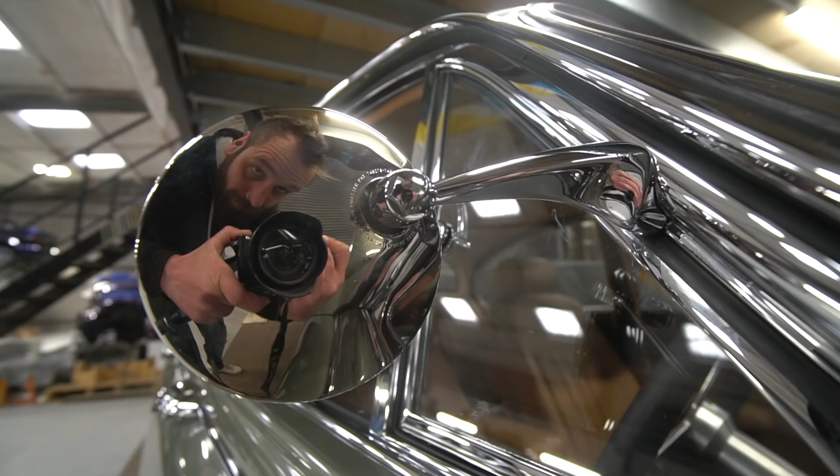So for me, you can see a bit of this latch in the passenger one, but I know Ian, who we're doing the car for, is a bit smaller than me, so he's going to be sitting further forward, so I suspect it'll be fine. So yeah, really happy with those.

They're on. And the other thing was the start switch, which we went a bit around the houses on the design of that as well. We've got the main switch panel has got these things called chicken head switches on there, and we did like a big version of that for the start switch, and we 3D printed it, and I was happy with it.

And then I just happened to be working. I was taking the clutch master cylinder out when that had a problem the other week. And I looked over while I was in the footwell, and we had the prototype one on there, and I thought, actually, it's blocking the text that says engine crank underneath, which was a nice detail on there.

So we went back to the drawing board, and we looked at some 1950s Rolls-Royce dashes, and there was this really cool - I mean, it was chrome in the Rolls-Royce - but this cool sort of crank handle design that was like a little round dome with a flat blade that sort of curved out slightly. So we drew up a version of that.

And then 3D printed a trial, really happy with that. Customer said okay, so Andy at Concept 303 machined that from acetal, and that looks great in there now. So I think that's just the finishing touch on there, brought everything together there.

The mirror's on. I've finished all my spanner checking work on this now, just got to put the rear spats back on. And I'm essentially now waiting for good weather.

We were just saying before we put the camera on that outside at the moment it sounds like all hell's breaking loose. There's rain lashing down, wind rattling the shutters. So I'm definitely not going out in it today, that's for sure. But yeah, next week, fingers crossed for the weather. I'm just going to get some miles on this, and then we're very close to handover.

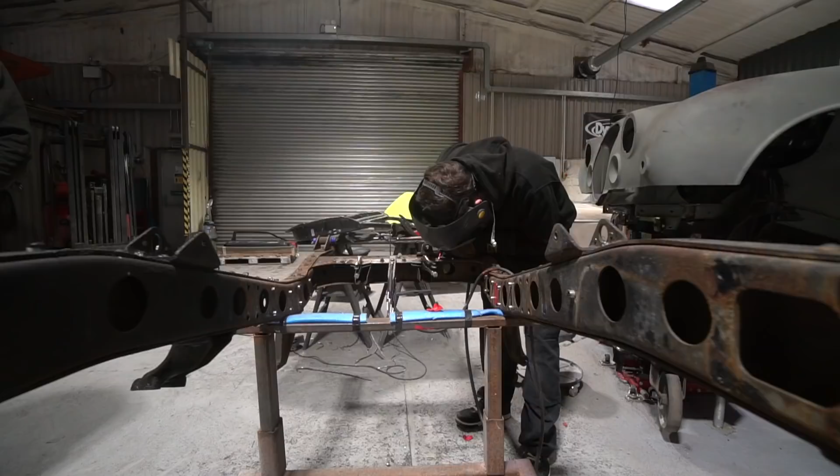Land Cruiser, I'm going to mention mechanically, it's not here at the moment. In fact, most of the components aren't here because we've been going through the various processes of getting everything ready. So I think last time we mentioned that we were getting the chassis ready to be blasted and powder coated. There are a few little things to do still on that.

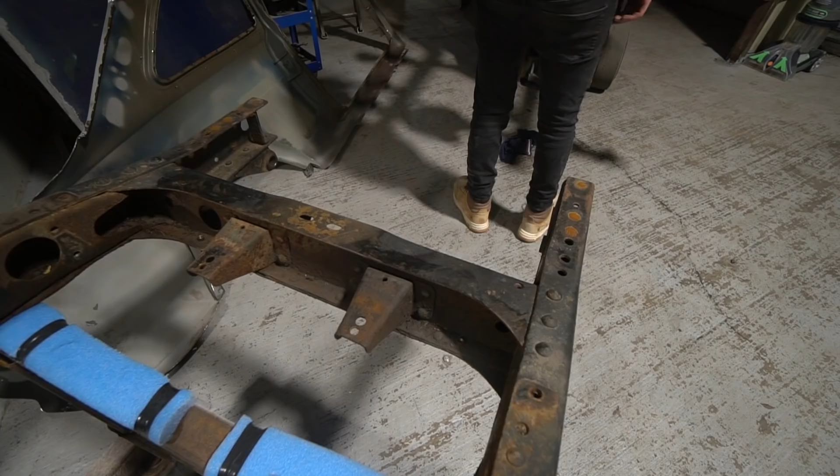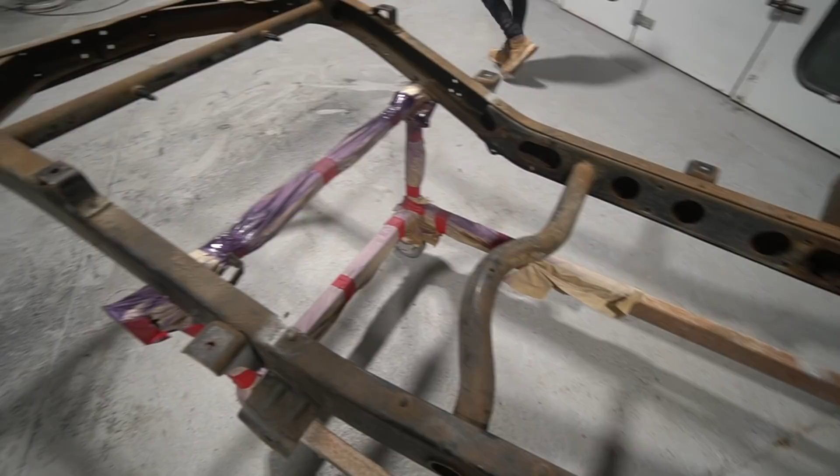So Tom was going to do a modification on where the rear cross member is and the rear lights mount. There's like a little tab on the end with a threaded insert in it as standard, and we were getting rid of that and putting a little smooth end on which matched the profile of the machined lamp protectors we'd made. So he was doing that change, and there was another change as well, and I can't think what it was.

There was a small hole we had to put in the front for where the spotlight bracket we'd made - it's like a tubular mount for the spotlights. We've drilled holes in there to run the wiring to the spotlight through the mount, and then we wanted to join that with a hole on the chassis so that the wiring is completely hidden.

And then we were also masking all of the threaded holes on the chassis so they don't get powder coat build-up in them. There's different ways you can do that. On a lot of the stuff, we've been prepping loads of components for it this week as well. We've got these little silicone conical bungs that you can put in to stop powder coat getting in.

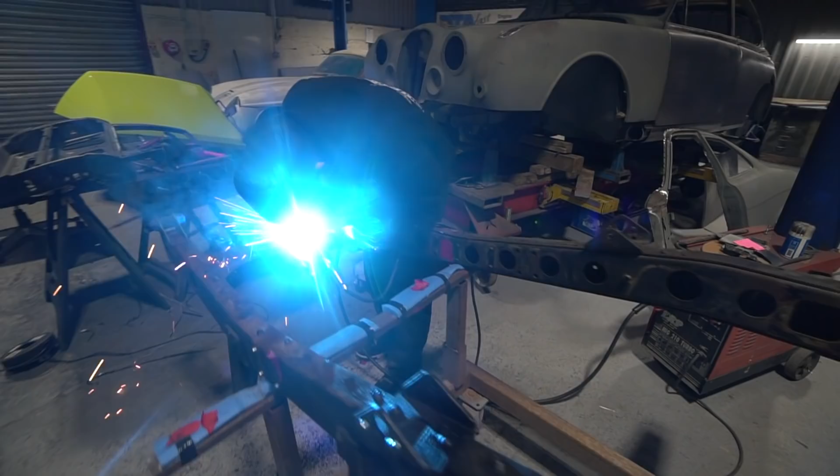On the chassis, we've actually done bolts in all holes, just sacrificial bolts essentially. They're cap heads, and we just fill the Allen key socket with silicone, so you can ping that out afterwards, get an Allen key in there, and undo them.

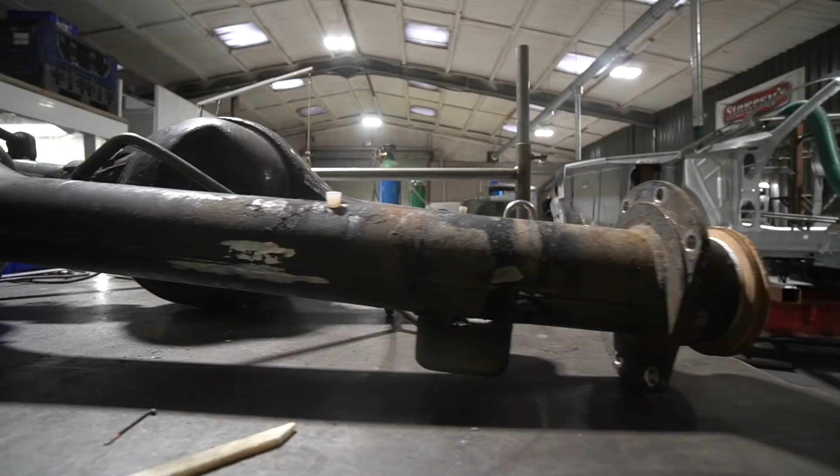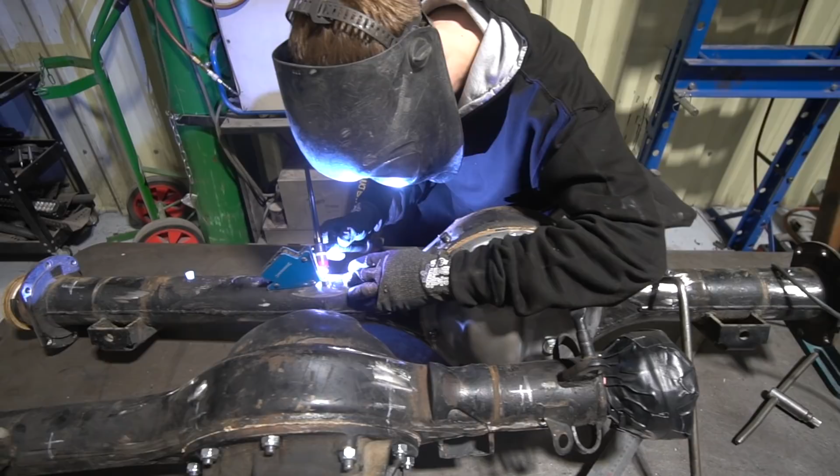It's just a nice way of keeping the threads really clean without it falling out during blasting. So the chassis is ready, the axle casings are ready - we probably showed them being prepped last week, but with those we strip everything out the axle, get the empty casing, bolt it back together, and then anywhere there's an opening, so the pinion hole and the axle shaft holes, we get wood cappings that we make, sealant them on, attach them with a threaded bar right through the axle and on the pinion as well. So everything's completely sealed up, and any machined faces, the mating faces, are masked by virtue of the casing being reassembled together. And things like the flange where the pinion goes and the axle half shaft flanges are masked by these wooden caps. So any machined surfaces are kept free of powder coat.

So that's ready to go. And then there's been various other bits we've been prepping for powder coat, masking up holes, etc. So a massive batch of parts has just gone for powder coat - I'm not actually sure how many, but I'd say there was a good sort of 20 to 30 parts.

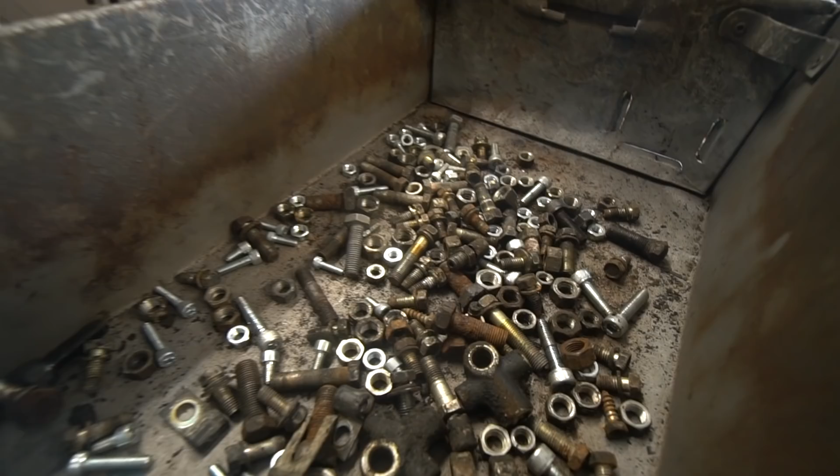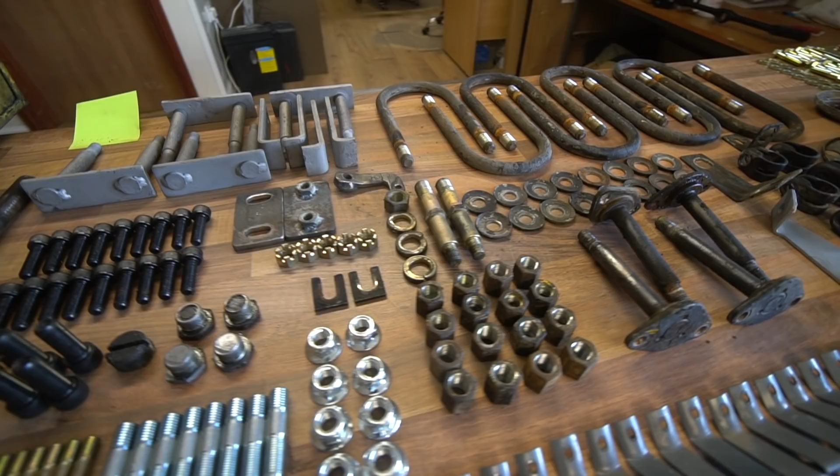And then the fasteners for the Land Cruiser - all the fasteners for the axles, anything attached to the chassis, body mounts, leaf spring shackles - they've all been prepared for Xylan coating, and also all the moving parts or components of the axle that have things bolted to them, like the knuckles that have the calipers bolted to them. They've all been prepared for Xylan coating.

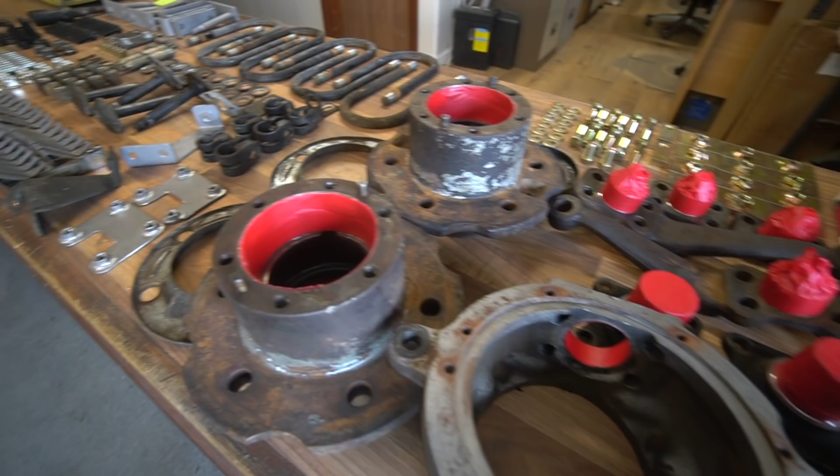And the leaf springs themselves, we wanted to use original leaf springs with a view to them being probably better quality than aftermarket ones, so we've actually stripped them apart to the individual leaves. They're going to be Xylan coated, which is quite good because it's a Teflon coating essentially, meaning there's a bit of slip between the leaves, and then they'll be re-riveted back together afterwards. So there's been a Xylan plating batch, which was I think 700 odd parts.

And that kind of brings me on to something the customer mentioned, because I showed him a photo of all the engine fasteners coming back from zinc plate, and they're all just in a big tub. And he said, how on earth do you know where they all go after you've had that done? Which is actually a really good question, and it's worth pointing out our process there.

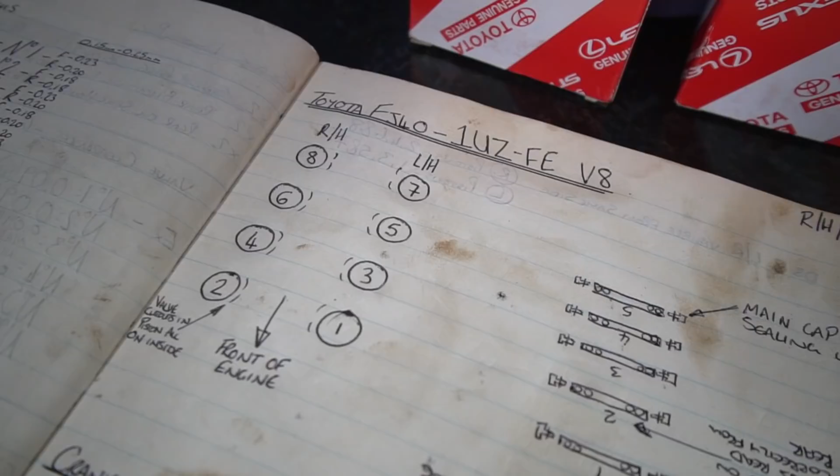So on the engine fasteners, for instance, when Adam stripped the engine down, he literally got a list in a notepad of every fastener, where it was, the size of the fastener - that's all in a massive list. And then what we do is we put those fasteners, as we take them off, next to a bag which we've labelled as what part of the engine it came from, let's say inlet manifold bolts, whatever. We photograph them next to that bag, so you've got a photo with the bolts and a label of what they did. Then the bolts all get put into one big tub which goes away for plating or coating. But we've given them then a stack of bags that are labelled, along with the photos.

So when they come back from plating, we take everything out of the big tub, and then we can use the photographs as reference to match them back up with their bags, put them in the bags, and then we've got a stack of labelled bags with all the components and where they went on the engine, plus as a fail-safe, a list as well in case the plating company lose everything. So that's how we do that.

Going to move over here. This will be a surprise - Vader is back here, and much to my frustration, and no doubt the owner's, we had a failure on it. So the clutch slave cylinder, which is a concentric slave inside the bell housing, failed very, very soon in him having the car back. He'd done a couple of journeys, but not many miles.

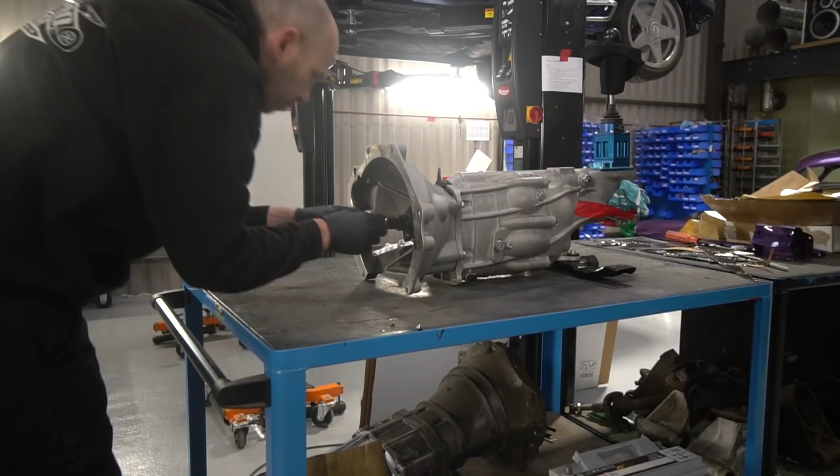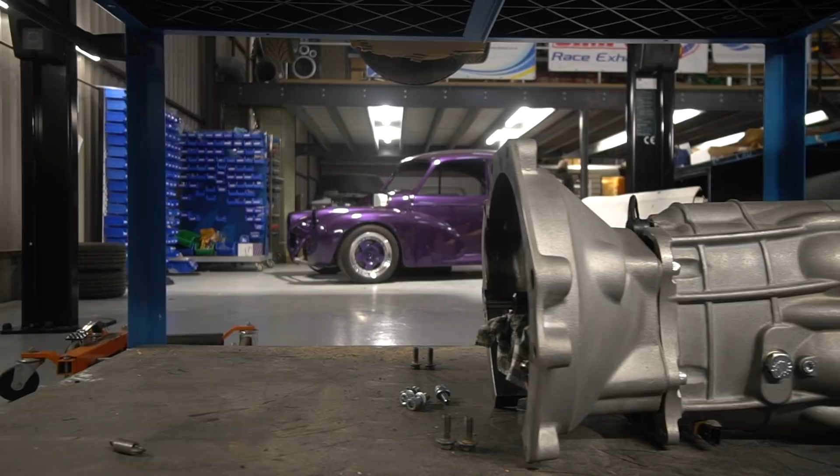Rather frustrating - the clutch pedal went to the floor, fluid out everywhere, and sure enough we took it apart, and the seals have failed in the clutch slave cylinder. So you probably watched previous episodes where I've been ranting on about poor quality aftermarket parts, and this just tallies up with that again. So we've got this out to replace the one that was in there with an AP one. I've got an AP clutch slave coming, and we're just machining up a different adapter because the bolt pattern's slightly different.

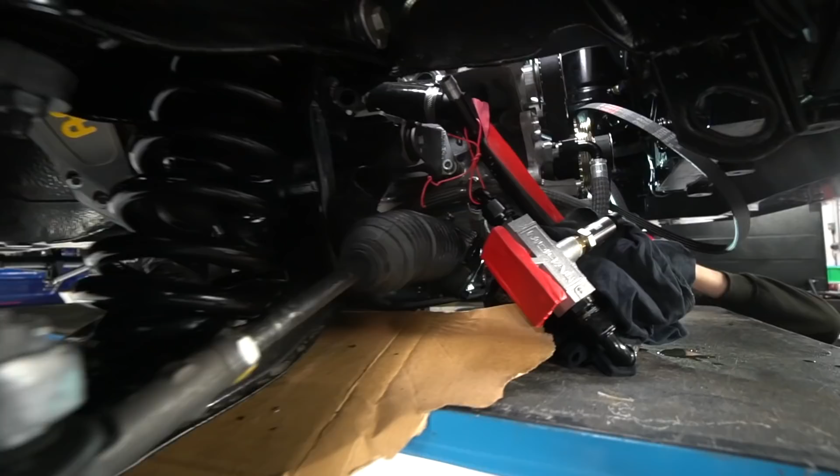I'm not totally surprised it happened, because the other Chevette we built had the same failure, but it lasted a lot longer before that failure occurred. Actually, we'd put this one together before the other one failed, and it had done a good few seasons of rallying. So I kind of put it down to the trauma of a few seasons rallying, but it's not.

It's evidently an issue with the seal inside the cylinder, so both cars will then be running AP cylinders once we've done the conversion on this.

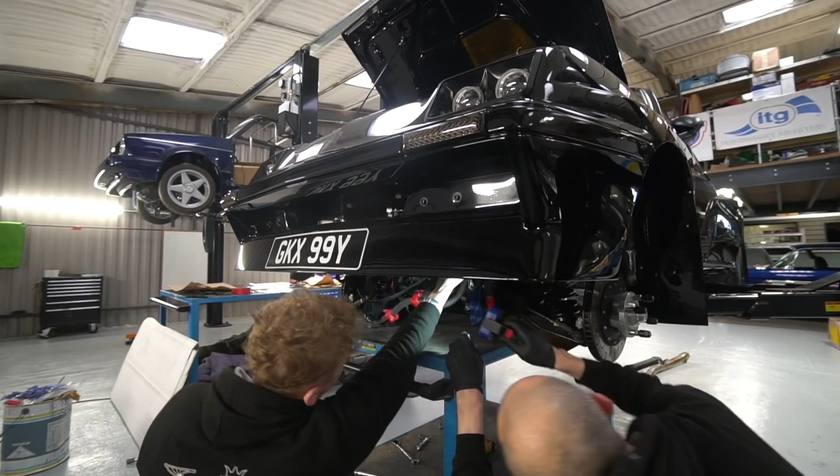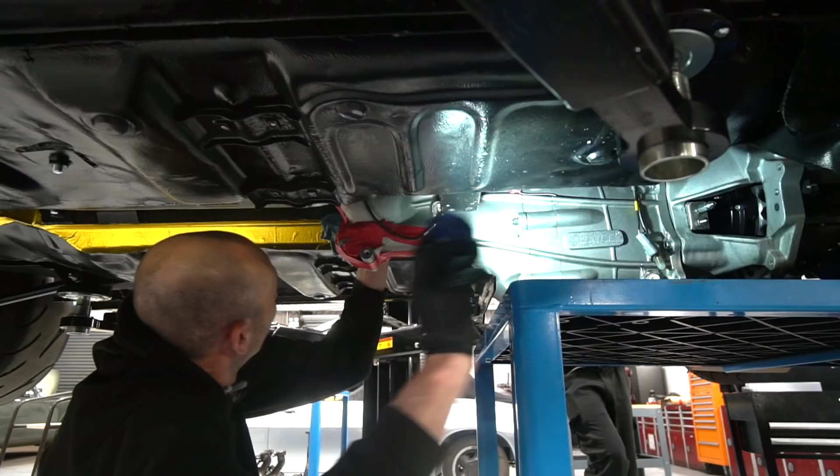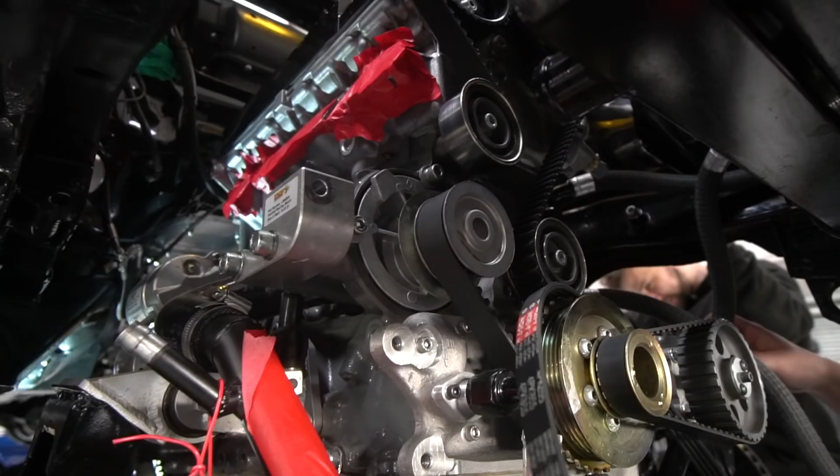So everything out - it's easiest on this to get the engine off, the gearbox off the engine. You can't just pull it back because of the way the shifter sits through the hole in the tunnel, so it's almost impossible to get the gearbox off the engine in situ. It's actually easier just to drop the entire front subframe down with the engine and box on it, then separate it all. It's actually given us the opportunity to tackle a couple of other little things as a result of snagging and shakedown.

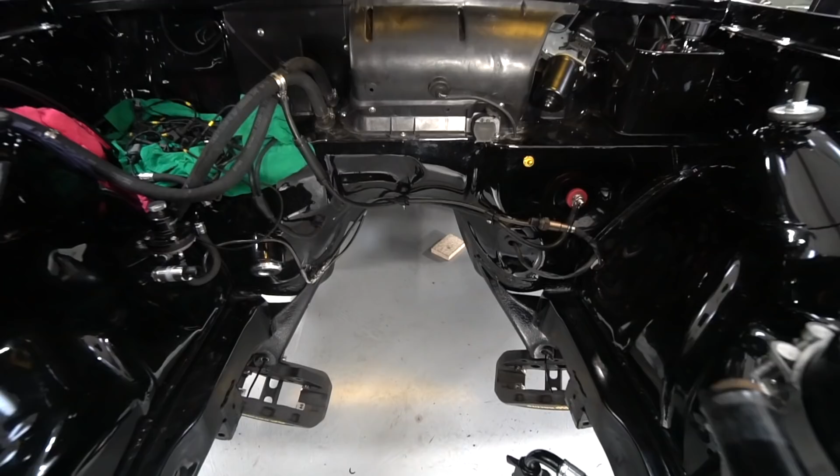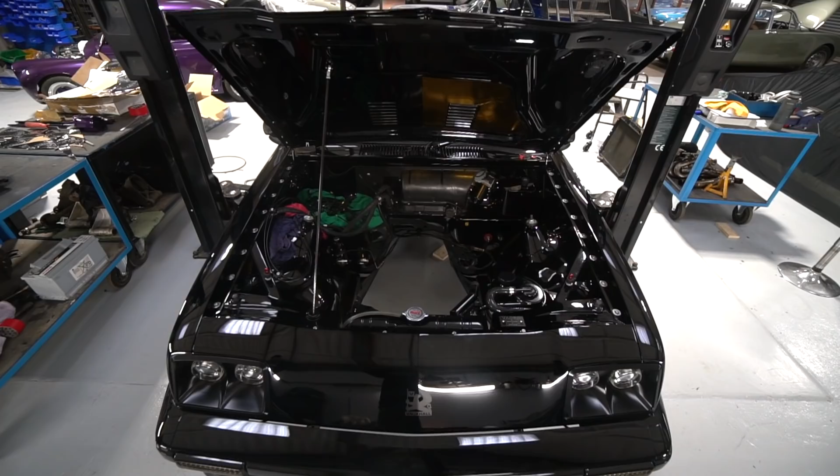There was a very small oil leak which only seemed to occur when the car was switched off, which is likely the dry sump tank draining back into the sump and basically filling the engine up to the point where there's oil sitting against the crank seal on the back, and I suspect that's what it would be. As it is, I've just sent the engine back to the engine builder so he can have a look and determine where the leak was and reseal it all. But it was convenient to get that done whilst we had it out.

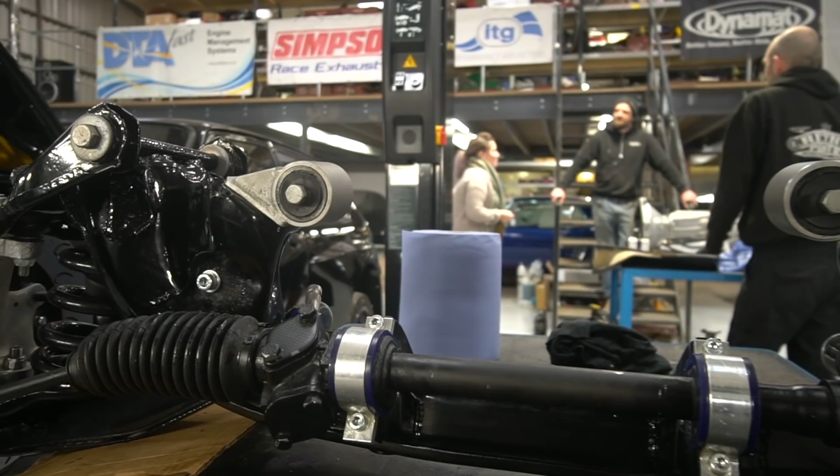We're also going to swap in some of our softer World Cup engine mounts. We did our own for Gordon Murray's car a while ago that are 40 Shore rubber rather than the 70 or 80 Shore that the usually available ones are. Although it wasn't really an issue with this one running the harder ones, because it's a fairly raw motorsporty car anyway, while we had the engine out and we now have a batch of those in stock again, we thought we'd swap them in just to get the engine vibration levels down slightly.

So yeah, basically clutch repairs, tackling a couple of other things while we're at it, and then that'll be going back to the owner again.

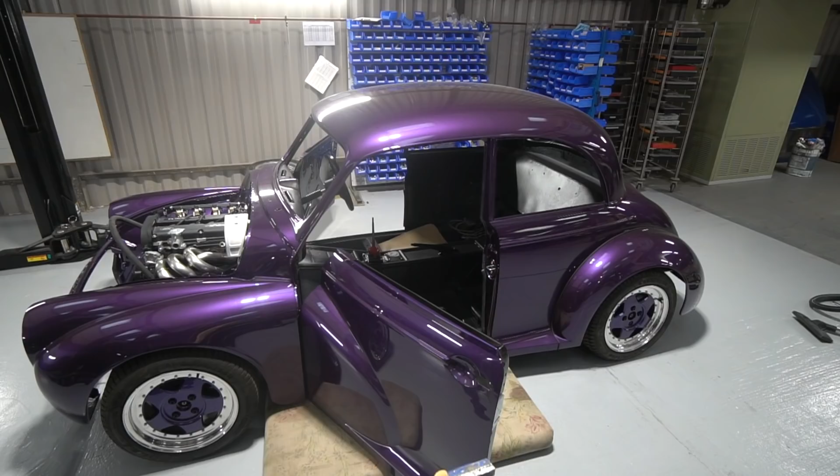John's been on with the Morris - in fact, he's on with it right now. So we're doing the Dynamat sound deadening on the inside of the Morris shell.

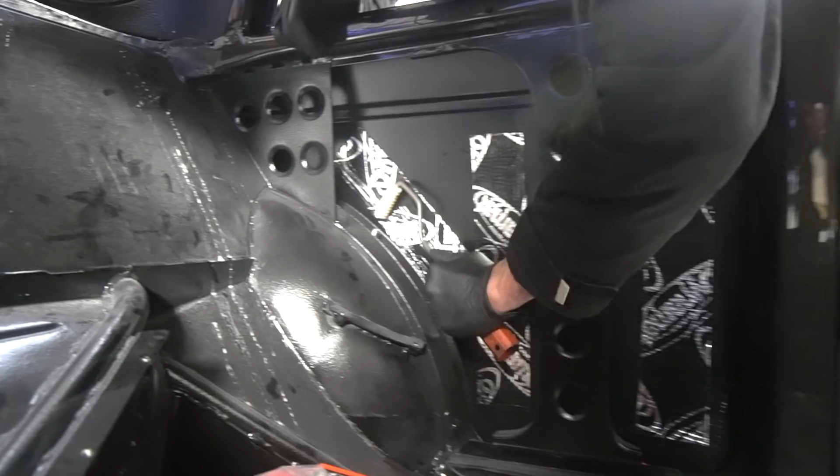Basically templating all the different areas where it's going to go, using paper, just cutting paper to the shape we want, transfer it onto the Dynamat, cut the piece out, stick it in, move on to the next piece. That's going really well, and it does really help keep that kind of drumming of the panels down, and on a car like this where we're trying to make it fairly refined, it's a really good step.

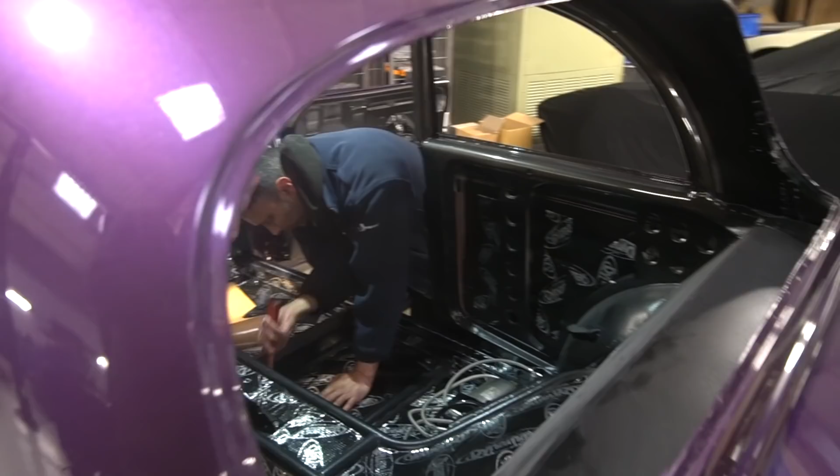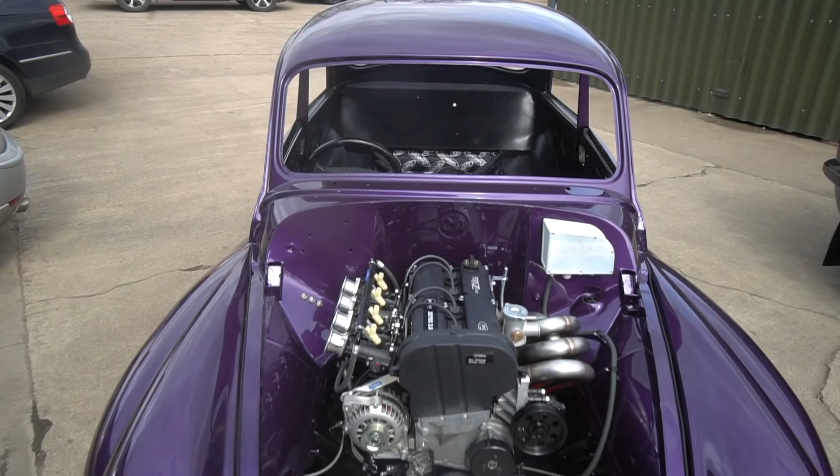On top of that Dynamat Extreme, we'll then have Dynaliner, this half-inch Dynaliner, which is more like a foamy material, which helps further deaden the sound, but it's also quite a good temperature barrier. So the car's going to have aircon, and it'll keep a lot of the exhaust heat out from the cabin and help keep it cool inside. And vice versa in winter - it's going to Scotland, so actually it's probably more commonly going to be beneficial the other way around, where it'll be keeping it warm inside.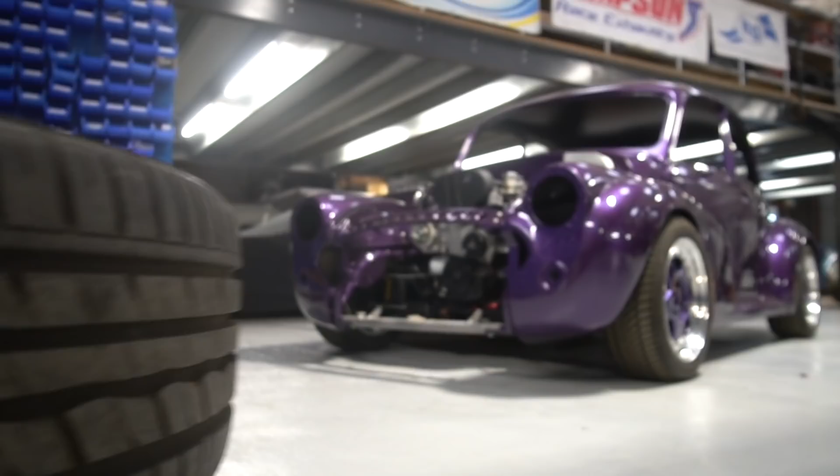But that's going in - we do that at this stage because we're then going to do some wax oiling down inside the doors, etc., before we do the wet sanding and polishing of the paint. Just so if water does manage to find its way into the doors, it's not straight into a bare metal seam. And we do the Dynamat before that, because any wax oil vapour that drifts out tends to then stop the Dynamat sticking. So Dynamat going in, wax oil, and then we're going to be wet sanding and buffing that.

Clippers on the ramp - because now this ramp's free, we're going to carry on with the fuel system. We're getting the in-tank lift pump in it, and then plumbing that up to a little swirl anti-surge tank that's got a Bosch 044 pump actually immersed inside it, which will be mounted up underneath. The combination of the two pumps will give us our anti-surge and high pressure feed that we want for the supercharged engine we're building for that.

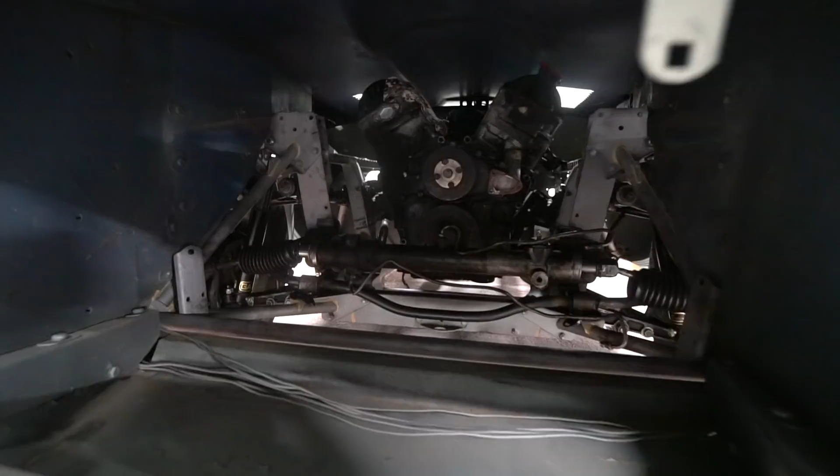So that's that. Probably the main area of progress elsewhere worthy of mention is the E-Type. George has done more scanning work on that, actually doing it in the background when I did last week's video.

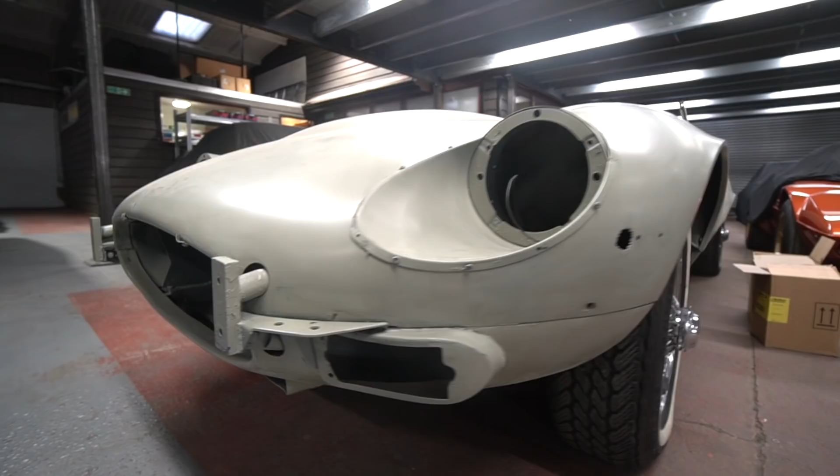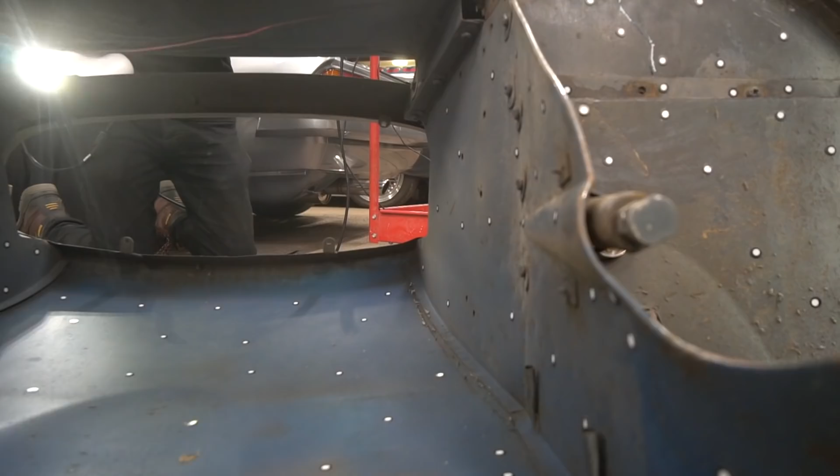We'd previously done a scan of all the back end and the inside, but without the bonnet and doors on. So we had all the engine etc, which we really wanted for when we start modelling engine components, but we'd never done one with the bonnet on. So we've now done a full scan with the bonnet on, the doors on, and we took the bonnet off and scanned the underside of the bonnet as well.

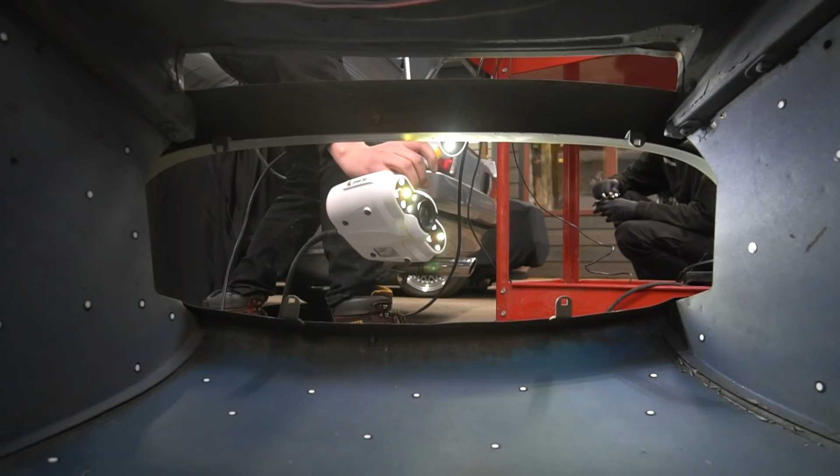That's for a number of reasons. We got to the point where, with the rear end remodelling, we wanted to assess that with the rest of the car in the render. So now we've got the full model with the bonnet, the whole car, that we can do a visual render of with the changes done, so we can assess and tweak.

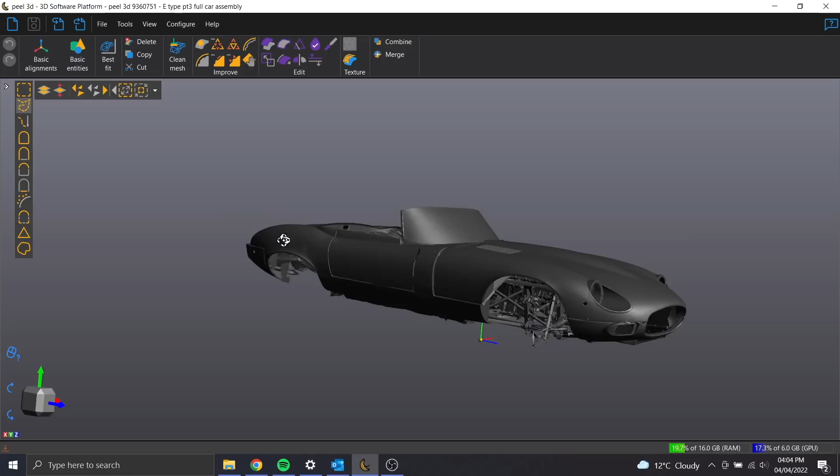But then we'll also need it for when we start work on the front bumper, headlights, grille, all of the front end components we've got to design, and the changes we're making to the front of the bonnet, which are very minimal actually. It's a great shape as standard, so it's just going to be deleting the Series 3 indicator side light plinths from the front, and then just doing a nice bumper and grille design.

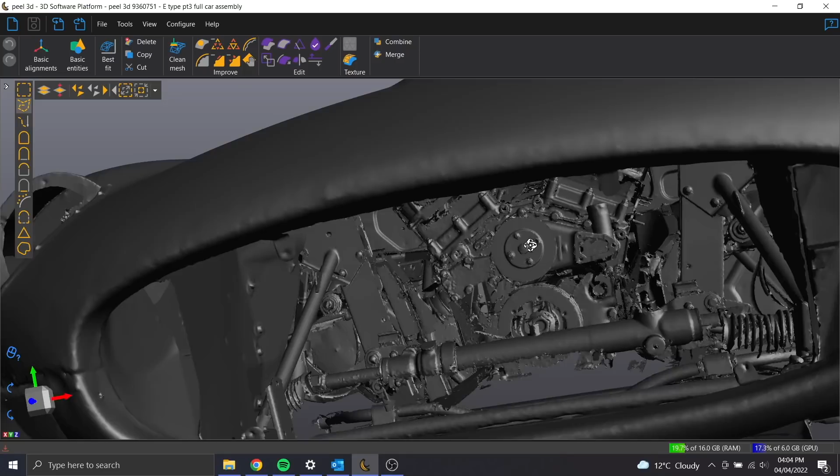But having the underside of the bonnet scanned is going to be really handy when we come to design engine components, because we scanned it with the bonnet off and the engine in, and then the bonnet at both sides. You can literally look at the clearance between the engine and the underside of the bonnet, which is particularly going to be useful when we come to do the air boxes.

It's going to run Jenvey throttle bodies, but then we're going to do air boxes on there, which actually mate up to some air ducting structure on the inside of the standard bonnet. Now that normally feeds just the heater blower and the foot air vents. But what we're going to do is repurpose that, because it's the only air feed at the front that doesn't go through the radiator.

As standard, there were some small air intakes crammed in with a kind of half-arsed, if I'm honest, shroud above the radiator that got a little bit of air coming over the top, but it's really not a great arrangement at all. Whereas actually the cabin air feed is really a separated feed each side of the main radiator that splits off at the very mouth of the car.

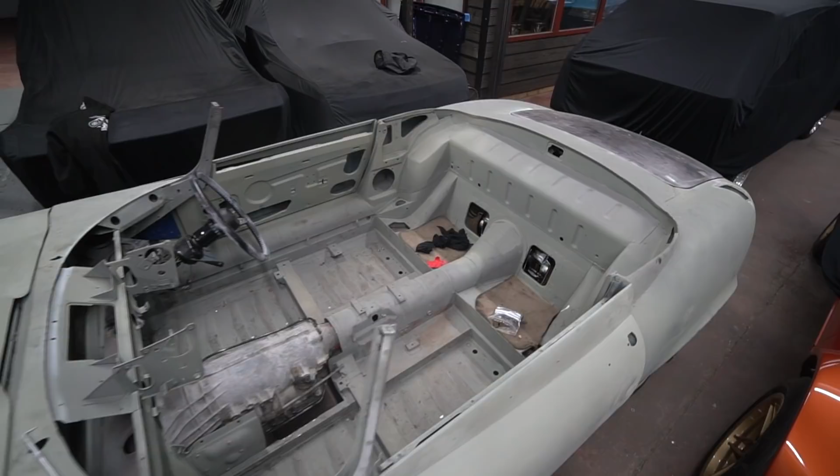So we're going to use that air ducting, reshape it somewhere along the bonnet to then mate up with our own air boxes. So it'll get a cold air feed to the engine through there. Multiple reasons, but we're in full 3D scan render mode on that at the moment.

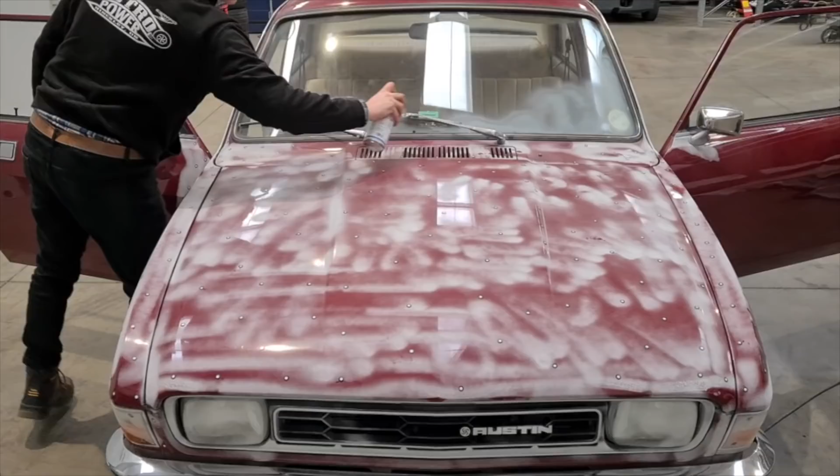Speaking of scan and render, George and I went over to scan an Allegro today. Now, Instagram followers probably won't be totally surprised by this. YouTube followers maybe, but we are building a pair of Austin Allegros, starting, I think they're actually the next arrivals, not just yet, but in the coming months.

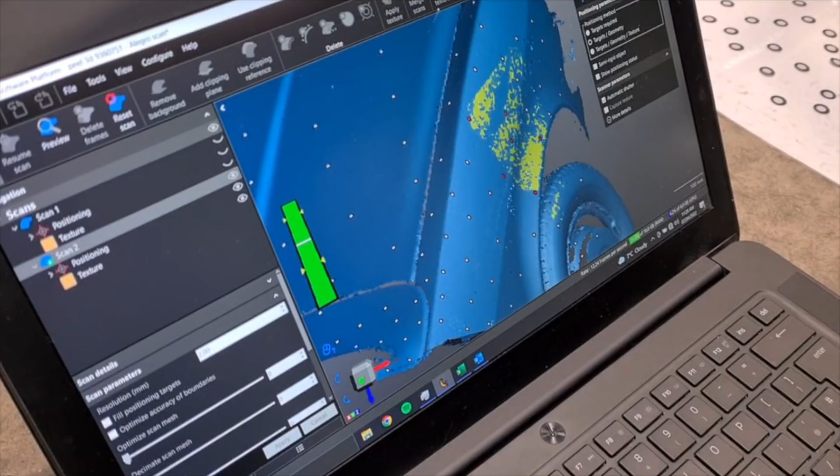We'll keep the exact spec under wraps, but suffice to say, we wanted to scan the engine bay and the positions of things like the bonnet, wings, bulkhead, with a view to what mechanicals are going to go into them. We'll reveal more of that when the time comes, but they're certainly going to be pretty special.

I'm hoping it'll be one of those projects where at the start everybody thinks, what on earth are you doing with an Allegro? You can't possibly make that a good car. And I'm hoping, fingers crossed, we prove everybody wrong, and even my own scepticism, and turn out a belting couple of cars. So that's to come in a few months.

In the meantime, I'll hand over to Nat to see what's been going on in the metalwork side.

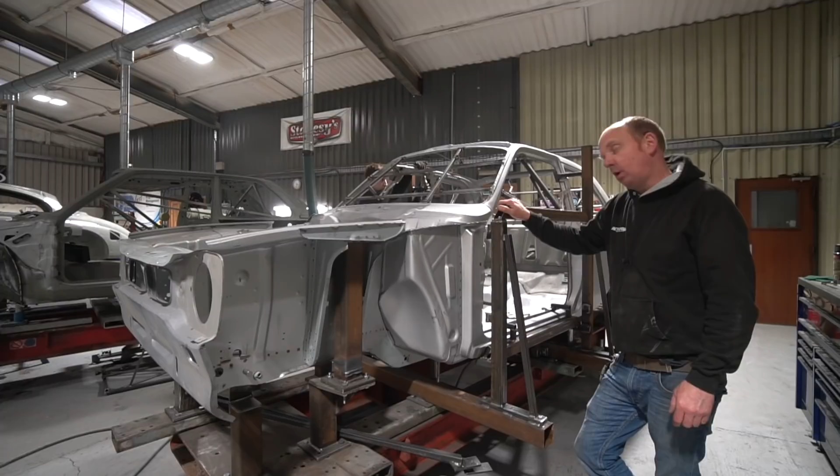Thank you, Cal, for the handover, and welcome to another week in the Retropower Metalwork shop. By my right hand, we have Project 1, the MK1 Escort. As you can see, we've got a little bit more done.

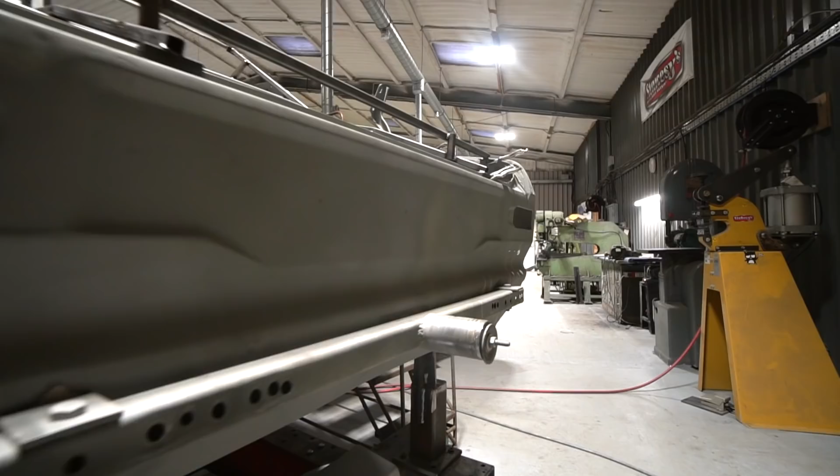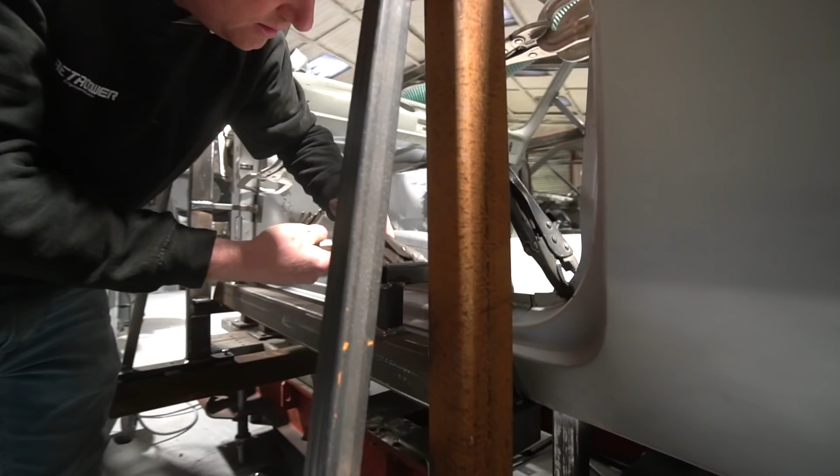Tom and I have been working on this week, and we have this quarter panel joined together and attached to the car. We've had a few ups and downs along the way with the joining together. The lower sill joint portion of the quarter panels are short by about 3/4 of an inch, so they've both had to be lengthened where they meet the front half of the body side, but the quarter panel and front body side joined to make the complete body side.

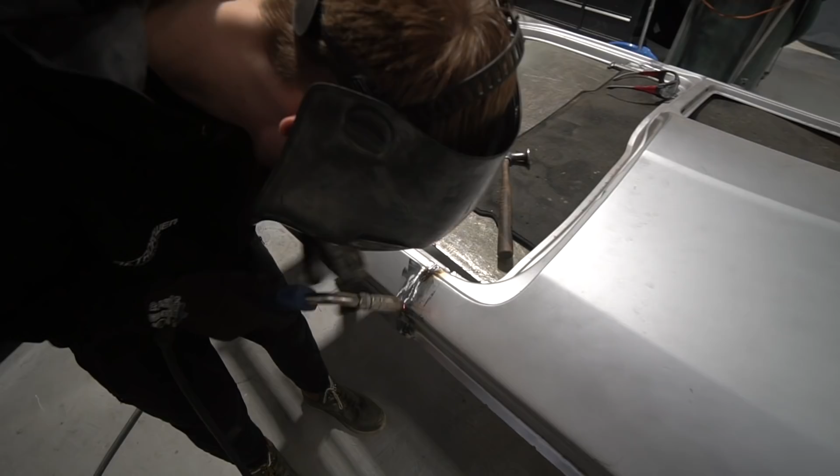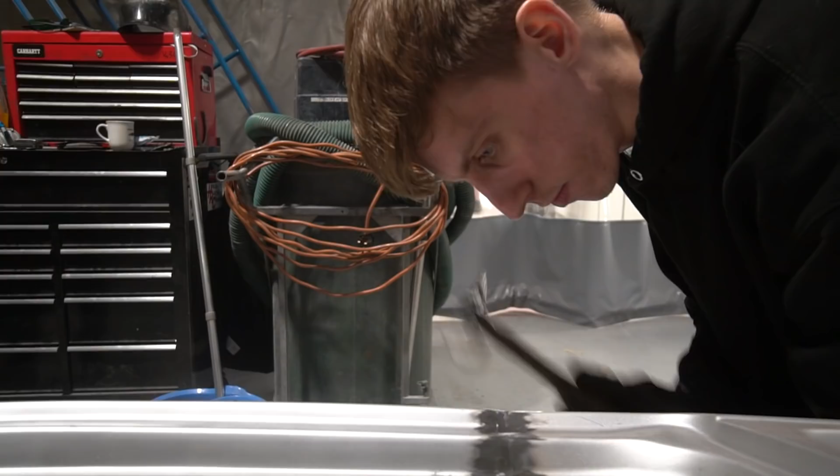So we had to do a little bit of lengthening there, and fettling at the top, and juggling around and fitting and unfitting the body side several times, probably several tens of times, and putting the jig on and off repeatedly. But we've got everything in the right place.

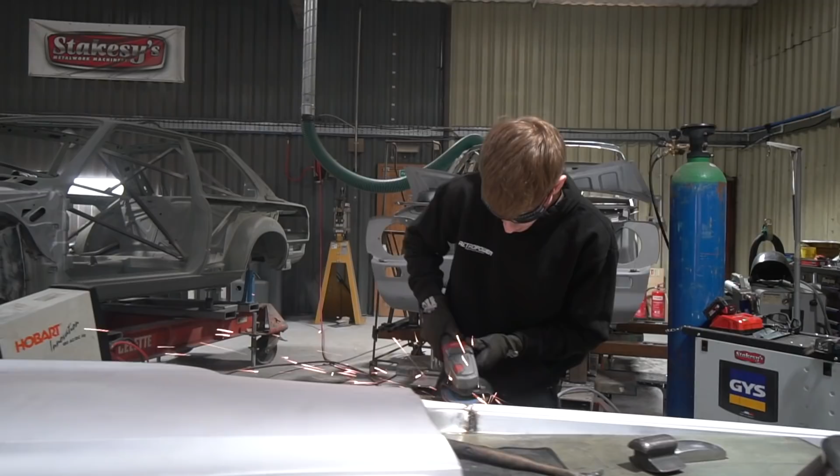Took it off, welded it up, blended all that out, put it all back on, chased out everything, checked all the dimensions, made sure all the window apertures were the right size, and roughly threw a door in to check it was somewhere near the right size.

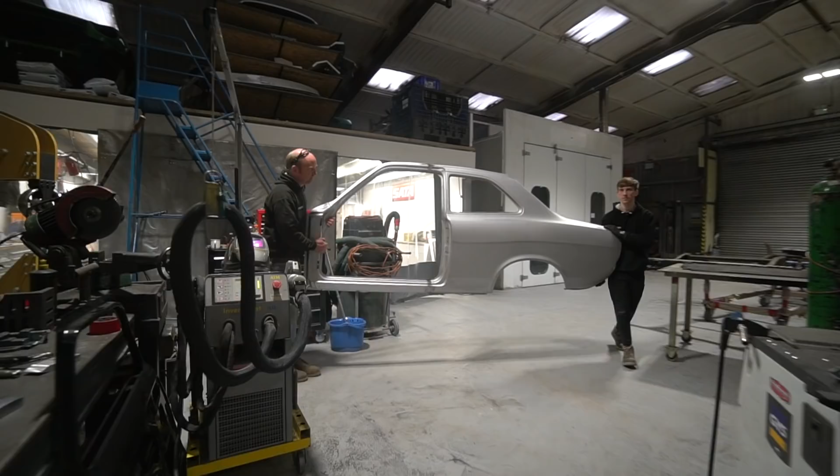Got everything lined up as best we can, made sure everything worked, got the window jigs in, had all the fixtures clamped up, got everything fitted up, loosely checked the door hinges were somewhere in the right ballpark, everything looked good, so that is now pretty much fully spot welded on.

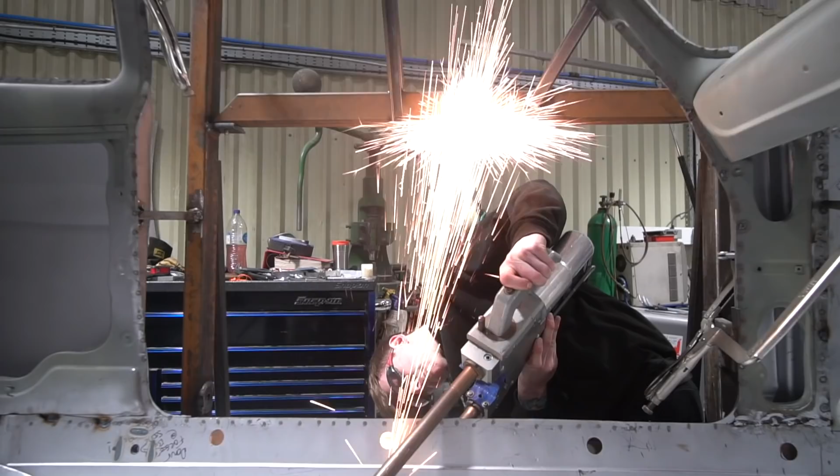There's a couple of bits where we can't get at with the spot welder because of the fixture being on at the moment. There's a few little bits left to finish spot welding, but the vast bulk of that is now spot welded in place.

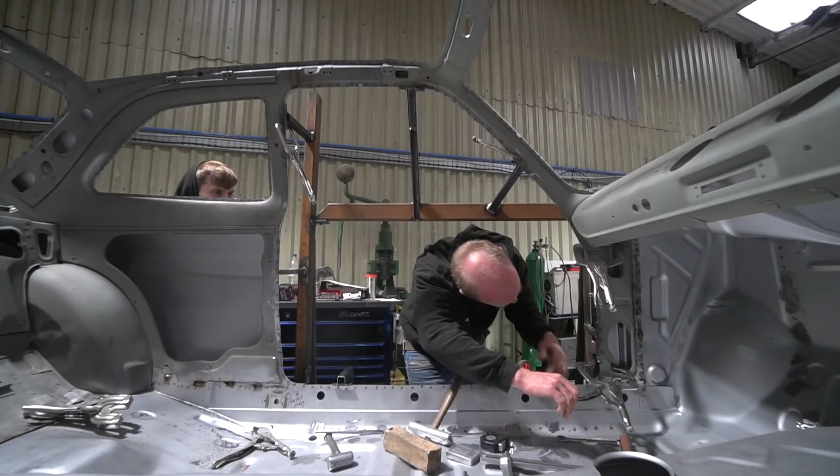And we've moved on to the far side, where the body side front section is on, not spot welded on, it's clamped on. The quarter panel is now temporarily clamped on because Tom's just working out the join points and making sure they're set correctly, having lengthened the bottom section. Then that'll be tacked up, that'll come off, car gets welded up on the bench, and then go back on.

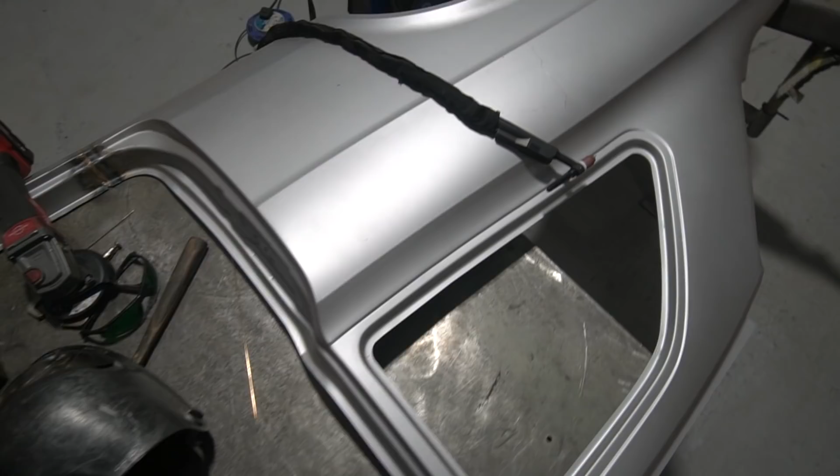Final check, trial fit of everything again. Once we're happy with everything there, we'll probably adjust the window gaps and the flange widths and everything else.

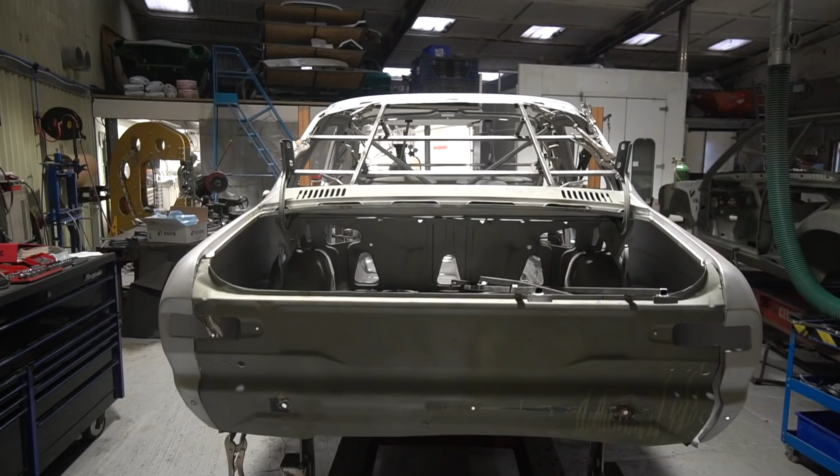Then we'll get that on, fully clamped everywhere, lots and lots of clamps to all the points on the fixture. All the apertures will have multiple clamps around them, clamps on the roof, clamps along the bottom, everything fully clamped up. Final dimensional check, diagonals put in between - as you may remember, there's two diagonals that go in across the corners of the roof to the lower parts of the pillars of the jig.

Get everything in, all the aperture jigs clamped in, everything clamped, basically every set of clamps we've got anywhere all clamped to the car, and at that point that side will be spot welded up as well.

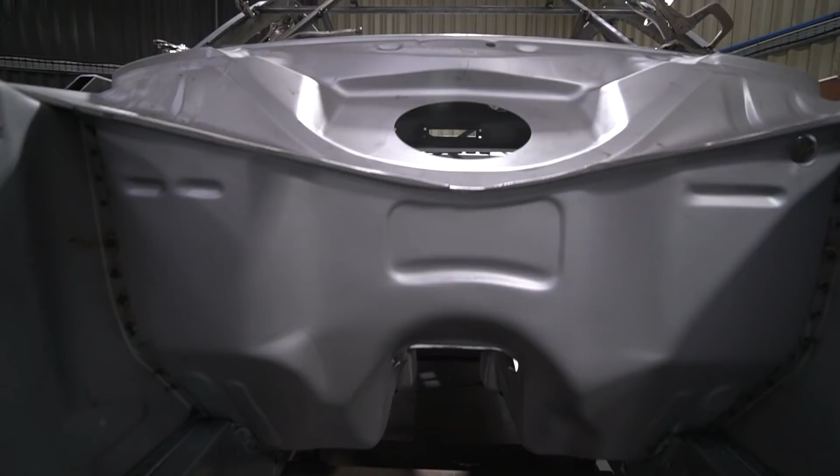So end of play tomorrow, both the body sides should be done, and we'll be either doing the roof or the rear panel depending on. I think we might actually do the rear panel. It might be a fresh week job starting on the roof because we've got to get the gutters on, and getting the gutter alignments is quite fiddly.

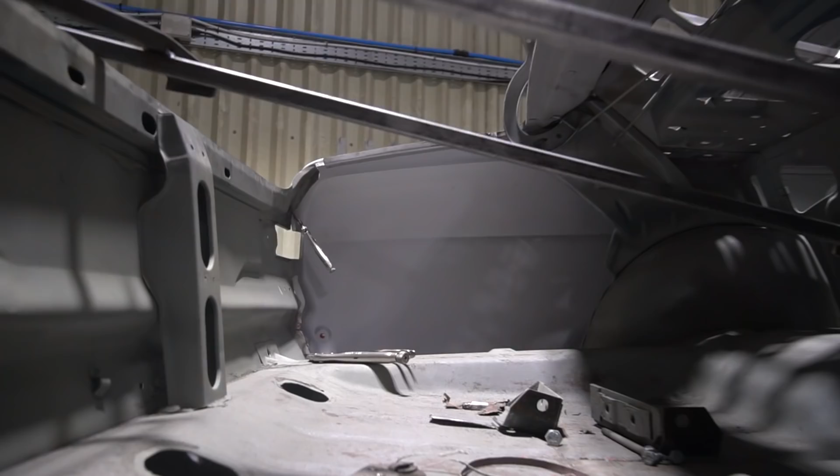So we might do that as a fresh Monday task rather than a Friday task. But yeah, basically next week we should have all the mending of the shell metalwork basically done, and we'll be moving into the phase of finishing that off.

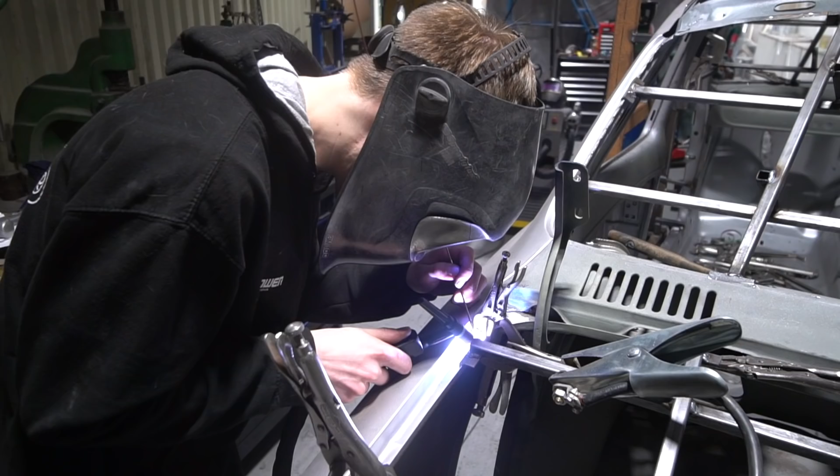Tom will be finishing that off while I do a bit more CAD work, and we'll be moving on into the custom metalwork rather than the standard Escort metalwork. There'll be some bits going on in parallel - we've got to seam braze, we'll be seam brazing and doing a few bits of seam welding.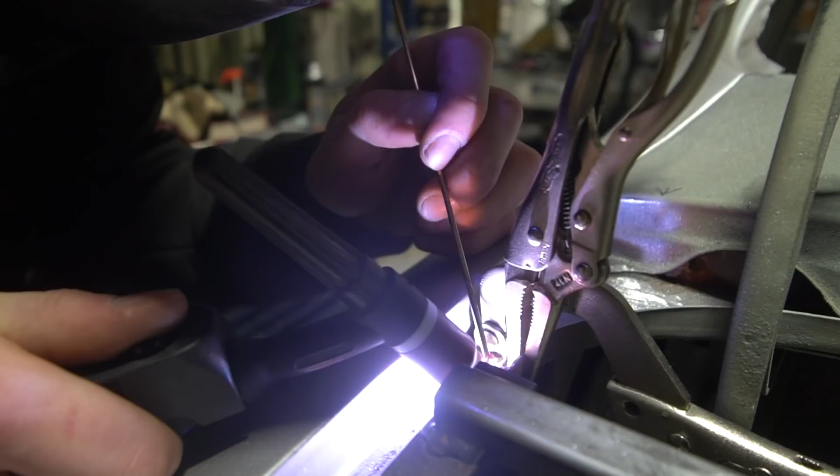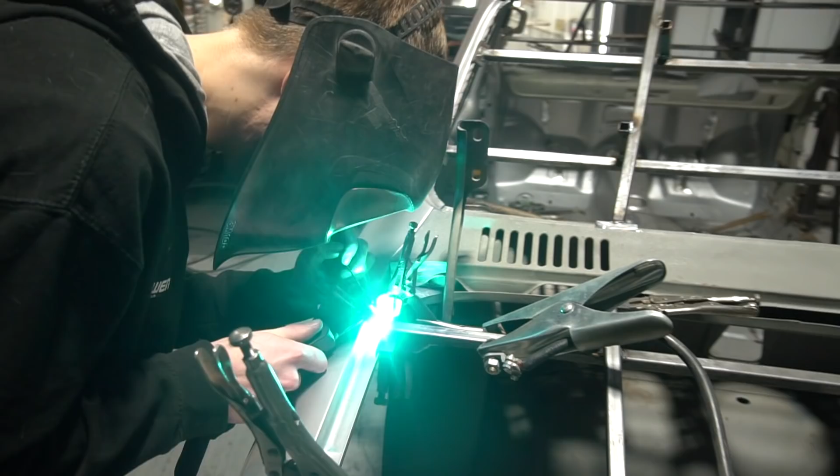Mainly seam TIG brazing the body shell, so there's work to do there as well. A lot of that will be done on the rotisserie, but some of it will be done on here. And we've got the transmission tunnel, the larger transmission tunnel to put in, and various other jobs as well. So there'll be a few things going on in parallel, and probably Tom will be doing most of that while I get the fixtures made for the rear end.

Viewers who have seen the Gordon Murray Mark 1 Escort build will know about the independent rear end that was built for that. This is going to be very similar, not the same, but very similar to that. And I only made some very rudimentary, very temporary fixtures which we scrapped when that car was done because we weren't planning on building any more.

And it was pretty much a one-off build. So I need to make new fixtures for that, which is no bad thing because there are going to be a couple of changes made to the rear end anyway. It's one of those things where I would stand by all that was done on that car - we were very, very happy with it, which is why we're effectively doing it again. But there are a couple of things that if I designed them again, I'd have changed slightly.

Just the way the front mounts are connected on the subframe. Because the subframe was revised to add a bit more compliance to get rid of some noise and vibration that was coming from it - that was a revision done within the constraints of the original frame.

Whereas now I'm starting from scratch with those different bushes, I will alter the subframe slightly to accommodate them from the beginning. So there's a couple of changes to do there. I'll be on with the CAD work around that to do the fixtures and draw up all the parts that I need to do the rear frame. So that's kind of my next move after we've got the basic metalwork done and made sure doors fit and things like that.

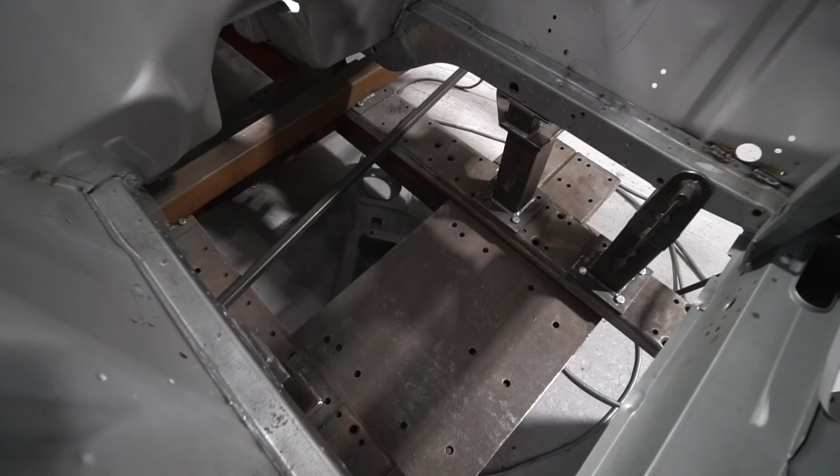I noticed a few questions about the bonnet and boot. We have the original ones for the moment, which we're going to use for setting the wing alignments and double checking everything, but we don't have the solution on those at the moment. A couple of people have commented about the delay in getting those from Magnum. Yes, we're currently juggling whether to do those as composite panels, carbon fibre panels, or as steel panels from Magnum. It will depend a little on lead time and availability of the steel panels. So decisions yet to be made on that.

Certainly for this stage of build, it'll be factory original panels, which were original on this car, but are slightly rusty. Not severely rusty, but too rusty to use. The problem with bonnets and boots for Escorts is for any build where longevity is a key, there basically can't be any rust because it's impossible to get that rust out.

If there is any rust at all in a bonnet or boot for an Escort, from our point of view it's scrap. The slightest piece of rust and it's of no use to us whatsoever, because we can't blast inside the bonnet frame, inside the front edges and inside the seams, and we can't dip them. If you dip them, they will rot out. We've done it before, and it's bitten us before. If you acid dip those, they're scrap. They don't forget it. They will be of no use whatsoever.

The rust simply creeps out afterwards, at some indeterminate point from a month after the process to 3 years after, and then there'll be no use at all. So basically, if there's any rust in them, they're no use to us. We need either new steel panels or new composite panels. So that's where we're undecided, but those are the two potential routes forward. That's where we are on that.

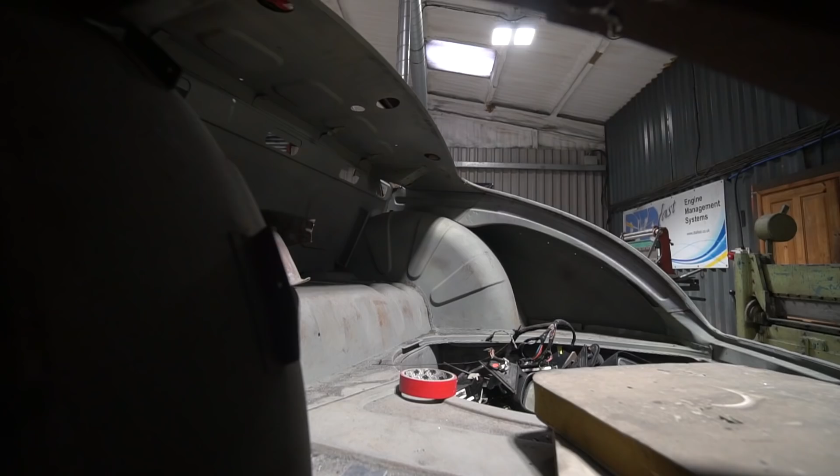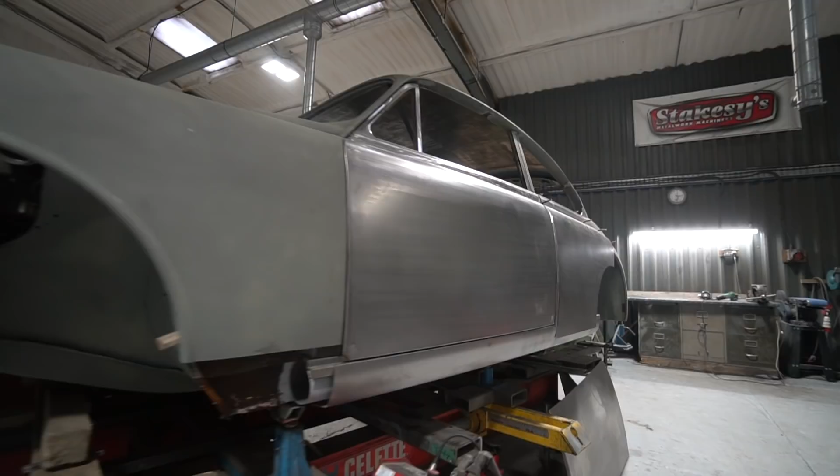We're going to leave Churchill this week, mainly because Stu's on holiday. A rare occurrence. Stu's gone on holiday, and I imagine he'll be listening to some peaceful and tranquil air sawing and maybe planishing hammers as a sort of audio book for his holiday. So yeah, Stu's away at the moment, so we'll leave Churchill, and we'll have a little wander through into the body shop area where we have a new old recruit.

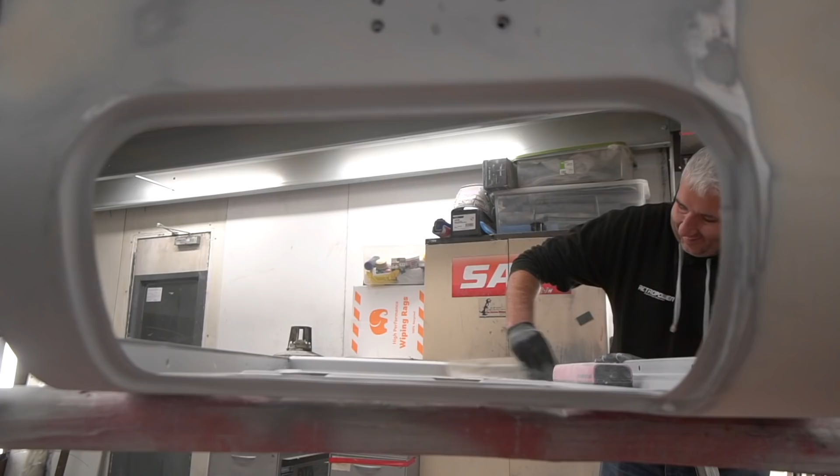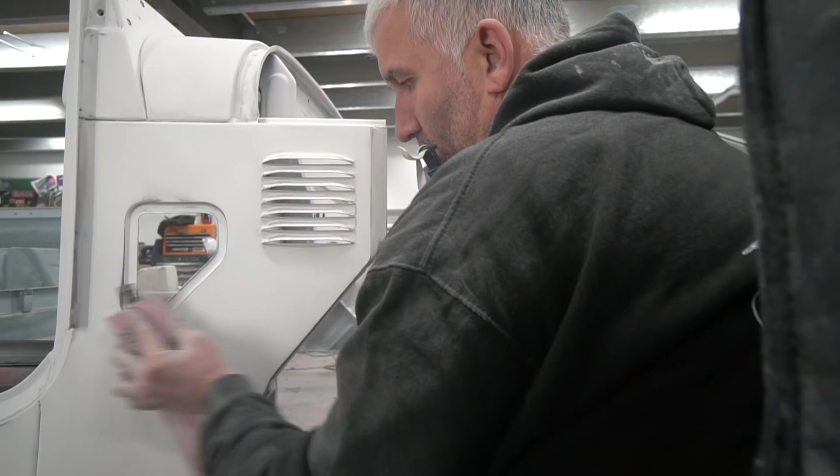Bonjour. We have Mark, one of our longest-standing members of staff, back with us following a sabbatical to France. He's now returned to us, and he's back on the team, which is really good. It's really nice to have him back, and he's in on the bodywork crew at the moment, principally in the bodywork area, but doing various other tasks as well.

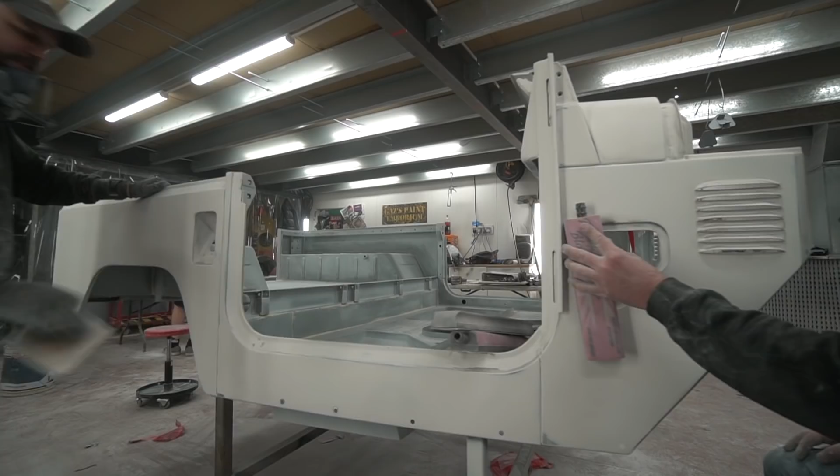There's a couple of other areas he's going to be helping out with as well, but at the moment he's just helping push through with the Land Cruiser panels, which has been a pretty effective push. Gaz has just finished priming the tub, front doors and bonnet. And all the rest of the panels are looking pretty close.

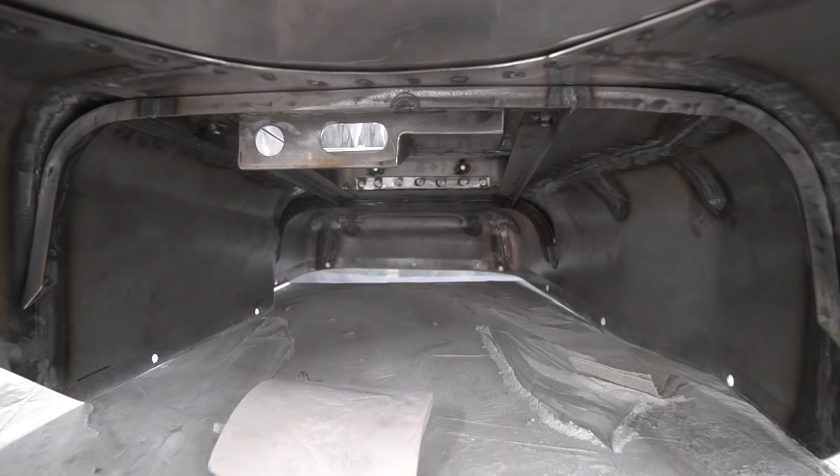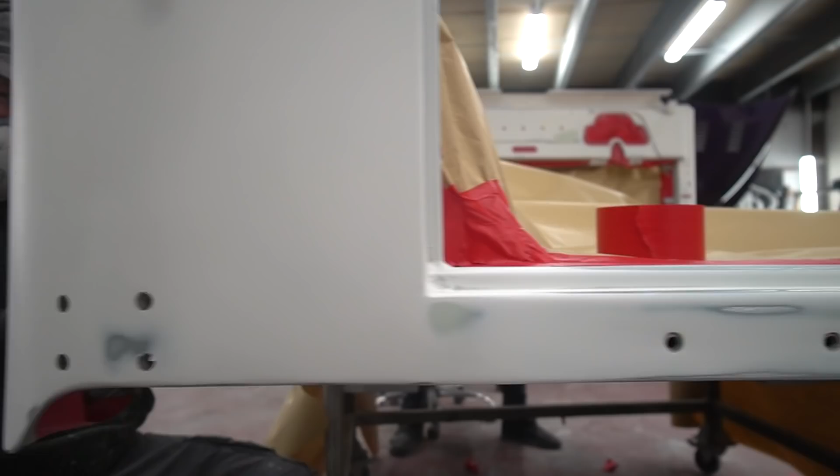Looking around me, the rest of them are pretty close, mostly in polyester and in the latter stages of prep by the looks of it. So we're going to be pretty close to having most of it in primer. I would say by the end of next week we're going to be all in primer. Things are now racing ahead pretty quickly with many hands making light work as they do. It's great to have Mark back, and keep watching, lots of Land Cruiser sanding, but it's going to be racing towards paint very rapidly now.

It's really good to see it cracking on. I think that probably rounds up about where we're at this week. Hope you enjoyed this little walk round, and see you again in a week's time.